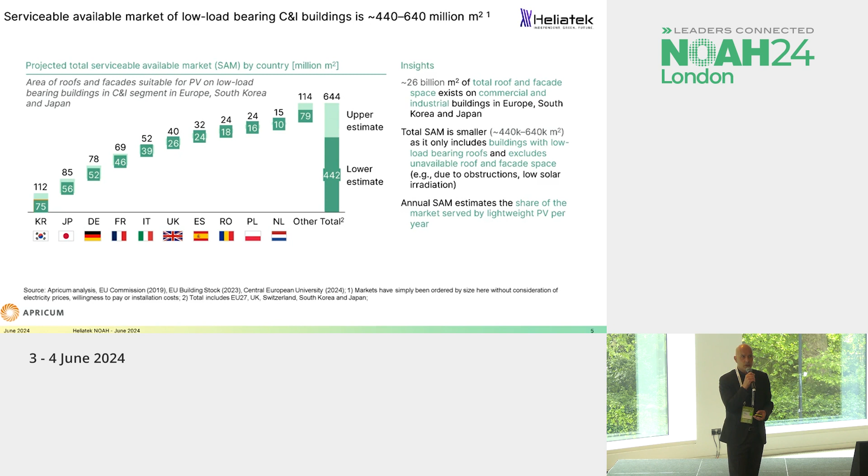That's an incredible lot. You see here, of course, countries like Korea, Japan, Germany, France, Italy tend to be highly affluent, densely populated countries with lots of cities and a growing allergy to having solar farms that pollute the landscape. And that's exactly where we want to play.

So who are we? We are a deep tech company from Germany. We were founded ages ago - we're not a startup. We were founded in 2006 by some visionary scientists who believe that you can mimic all the key electronic functions in the world by using purely organic materials. That doesn't mean you can eat it, but it doesn't take any of the typical China-based scarce materials. And they built a number of companies, and we're one of them.

And what we do is we build a complete solar cell based on organic materials that we develop ourselves. We've been backed by some very patient and loyal investors since 2006, and we've built a factory in Dresden, Germany.

And we're producing - you see there the truck - we produce rolls, and these rolls are 2.6 kilometers long. They're thin as a hair, maybe not as thin as my hair, but they're thin. They weigh almost nothing, and they're a fully self-supporting solar panel.

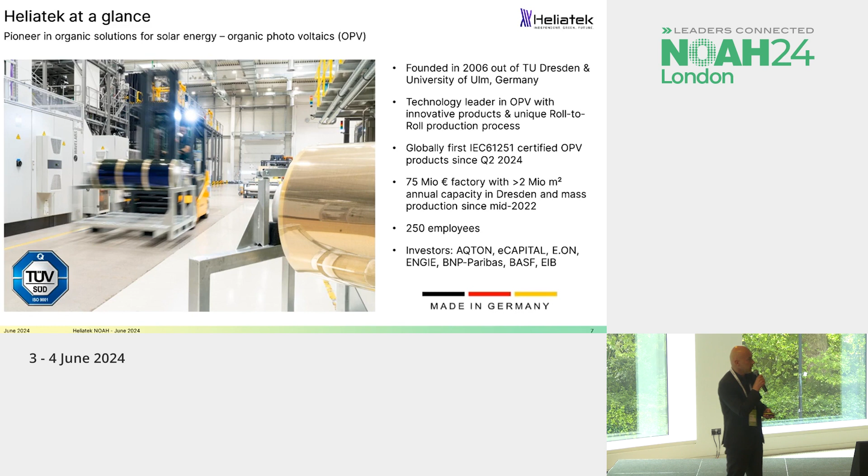Some serious money has been invested to build that factory. And you see here, it's full of very fancy equipment that we developed ourselves with a few reputed machine builders. It's about a 5,000 square meter footprint factory that can produce up to 2 million square meters of solar film per year.

And you see in the picture in the bottom left, a guy on the forklift, and he carries one of those rolls. So that roll is 2.6 kilometers long, and it's one big solar film that we cut in pieces, we protect it, we connect it, and you get a product.

This roll-to-roll production is the key. It's done in vacuum to guarantee super high-grade material so that we have a long lifetime. Because if you use the word organic, I always say two things: first of all, you cannot eat it.

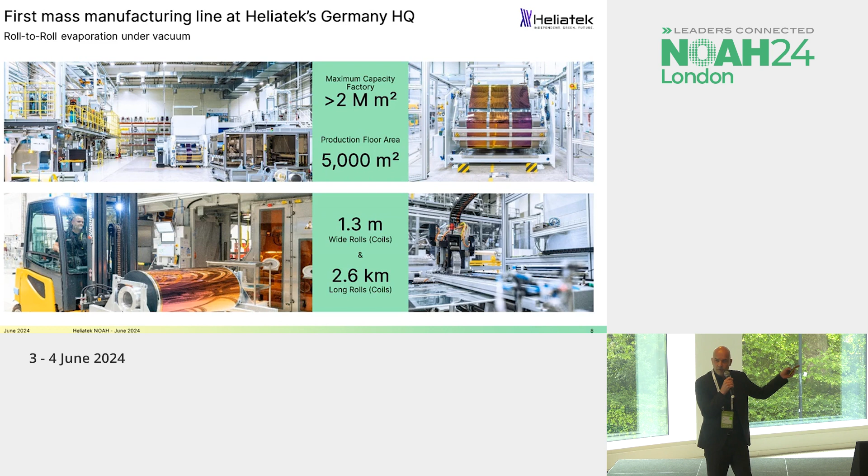Secondly, everybody always wonders, yeah, but that doesn't sound very robust. How about the lifetime? And how about the performance? You need that type of factory to make those things work.

So since 2006, we've been continuously doing this. We have about 456 patents at the moment, latest count, fully owned. We are the world leader when it comes to organic materials for solar cells. And we build not just a single junction cell, we build a triple junction cell that we produce in high volume in our factory.

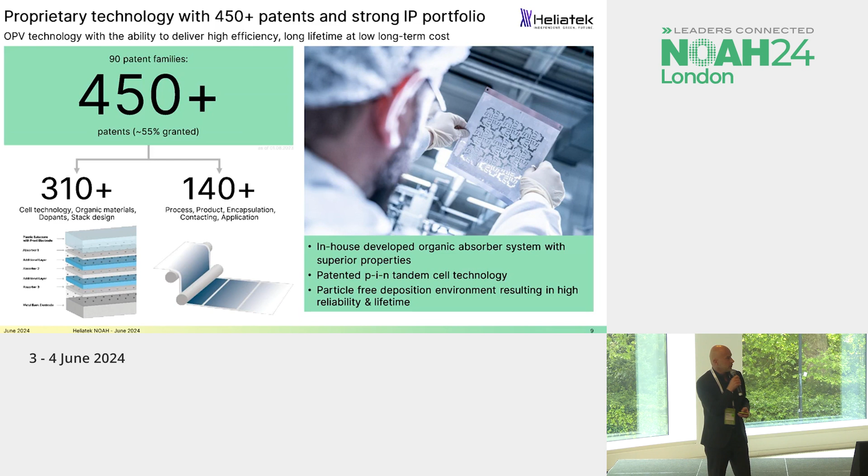And then protect it against all the elements. So you get a product that looks like this. It's like a thin sheet, and it not only works well, it looks beautiful. This doesn't look like a solar panel.

We call this a solar module. It's flexible, it's super lightweight, and it fits basically on every surface of a building, whether it's a facade, a roof, curved, etc.

Lightweight is less than 2 kilograms per square meter. That means it fits every low static building.

It is the fastest decarbonizing product on the market. What that means is when you install it, within 99 days, you have compensated for all the CO2 that was emitted while producing it. And after that, after 99 days, you are net reducing your carbon footprint. That's a lot faster than traditional solar panels, where you have to think about 2 to 5 years.

Funny thing is, our performance is temperature independent. And that's maybe a weird statement, but if you realize when the sun shines on a roof, it tends to get warm. Solar panels have this annoying habit of getting worse when it gets warm.

There are many examples. If you go to places like Texas, it gets so hot in the summer that the best yield you get from your solar panels is in the spring. In our case, it stays flat, the performance. We've tested this with many customers in very hot places like Dubai, even testing against sandstorms.

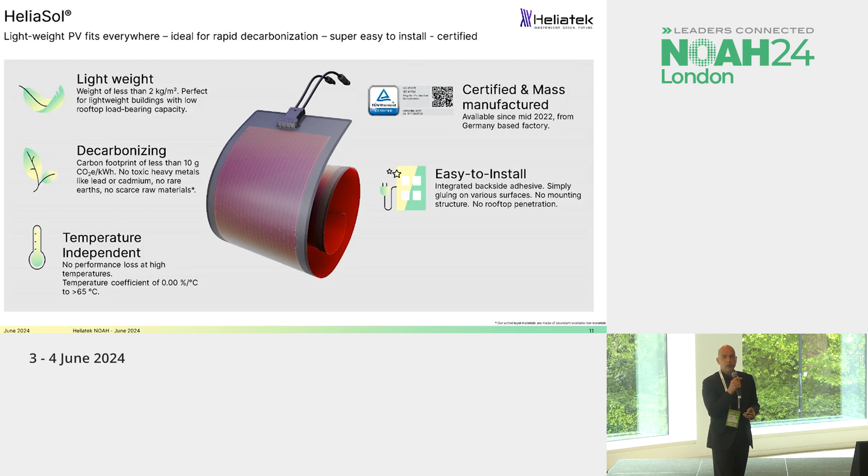So we have now, for the first time, a fully certified, mass manufactured product that is also super easy to install. A little bit about the carbon footprint.

Carbon footprint has been certified as well, but now we did it in the complete life cycle, including end of life. We don't play this trick that normal solar panels do, where you only look at the beginning and you ignore what happens end of life. In our case, it's including end of life.

And what that means is you basically have only a carbon footprint of about 8 grams of CO2 per kilowatt hour electricity generated. And that's for a not so sunny location like our headquarters in Dresden. It gets better if you go south.

So we are 100 times greener than lignite. Well, who wants to use that anymore? We're 50 times greener than the average grid mix today, and we're 6 times greener than regular silicon-based modules without the pain of having an enormous quantity of end-of-life solar panels ending up in waste dumps. And the first illegal dumps are already starting in Africa and in South America.

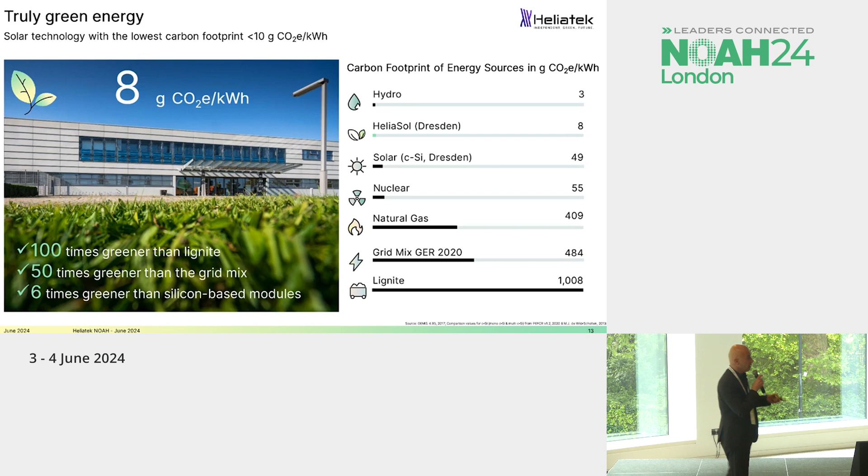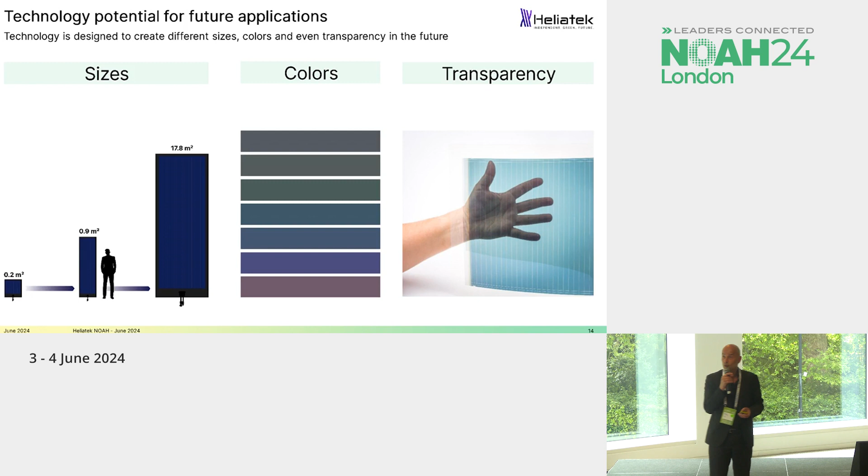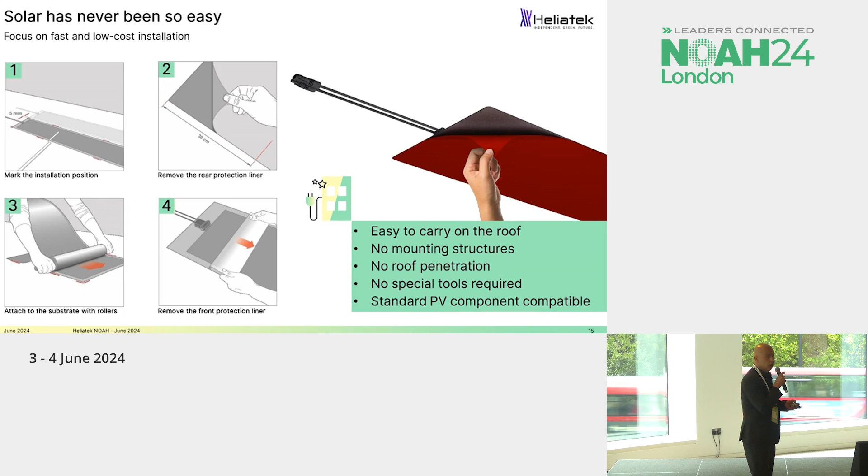How is it installed? The product comes with a self-adhesive backside. That adhesive layer is certified for a number of underground materials, and it's record fast installing. You talk about 2 minutes per square meter, and you don't need any specialized personnel for that. You don't have to drill holes in your ceiling, so you can leave your roof untouched.

We therefore get requests from all around the world for the product. Everybody sees the principal advantage, and this is just a matter of rolling it out.

So where are we? We have successfully moved from a lab environment to mass manufacturing. We have an IEC certified product. We're shipping. We're not just showing PowerPoints. We have customers, we offer them the fastest way to decarbonize.

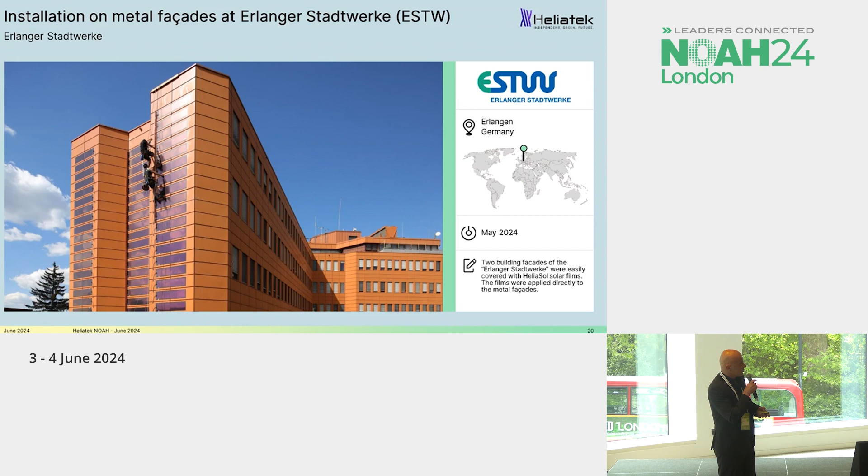Just to give you a flavor of what we do, this is an installation we did just last month. It's in a municipality electricity works in Germany. We did the facade. This is a rather nice roof installation on lightweight logistic halls. If you look on our YouTube channel, you see fantastic drone movies the customer made. They're super excited about this.

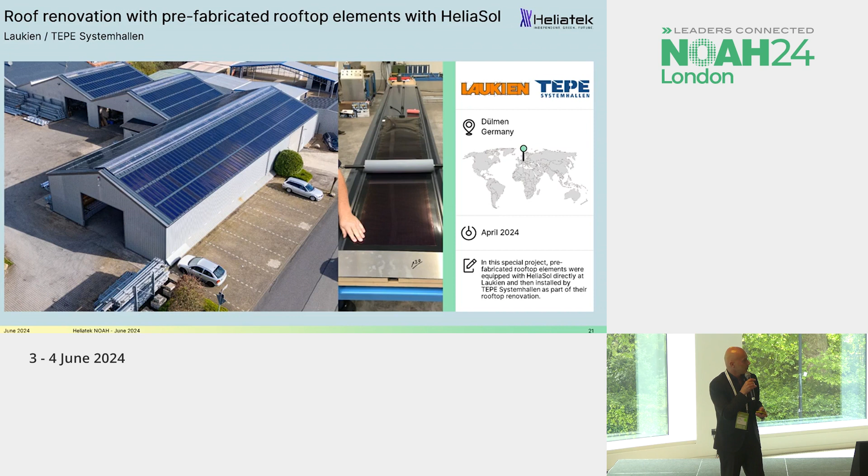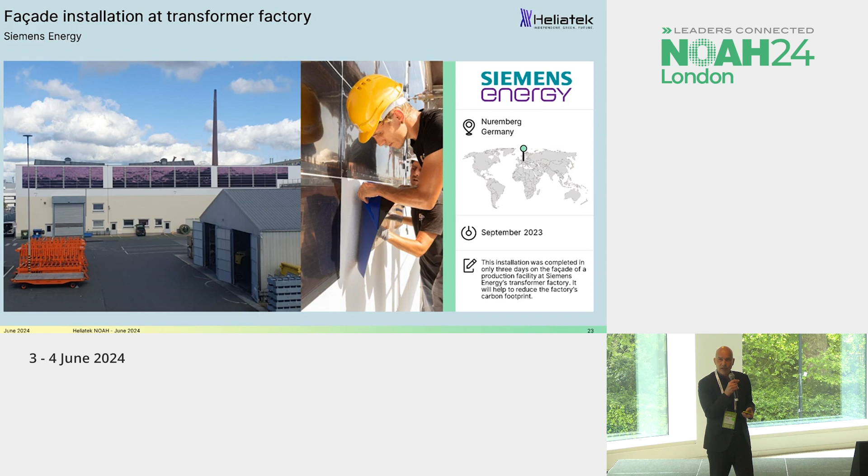In the end, it's all about covering as many square meters as you can find on your buildings to generate electricity. This is a building of the Samsung Research Center in Korea. Their roofs are unsuited for solar. They're full of equipment. So you have to use the facades. They have no space for solar farms. So this is the way.

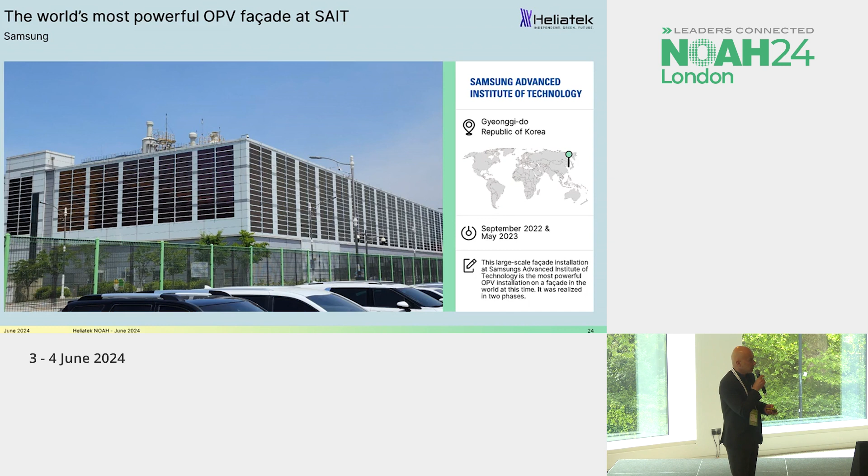Samsung has been super progressive in their carbon targets and is basically rolling out our product across their buildings. They have 145 buildings in Korea and Vietnam together.